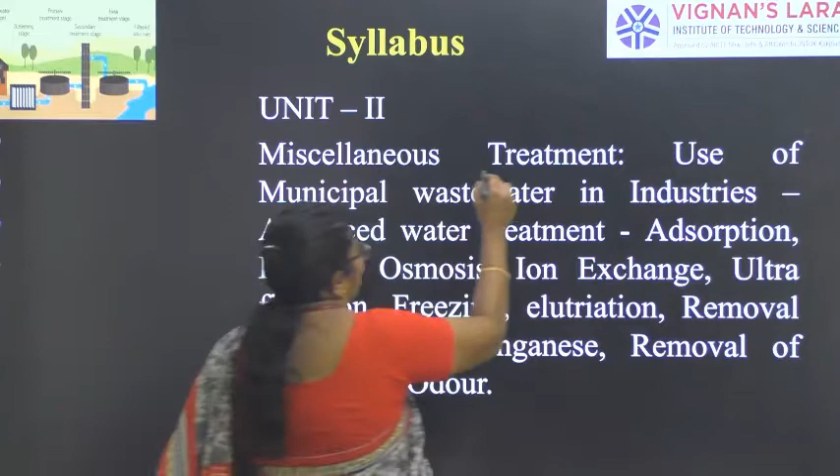Welcome students. In wastewater management, in the first unit we saw the process water in different industries, right? Quality and quantity of water, and we saw what water is required for different industries. In this unit we will go over the different treatment methods of the water. So the treatment methods, what is the advanced treatment, and what is the use of municipal wastewater in the industries.

So the main thing is, wastewater treatment consists of applying known technology to improve or upgrade the quality of the wastewater. Even filtration, sedimentation, small things also come under this, to improve the quality, that is, upgrade the quality of the wastewater.

The main objective of wastewater treatment is to allow human and industrial effluents to be disposed of without danger to human health or unacceptable damage to the natural environment. So it should not cause any damage to the natural environment or to human health. That is why we go for treatment of the water, either municipal wastewater or industrial wastewater.

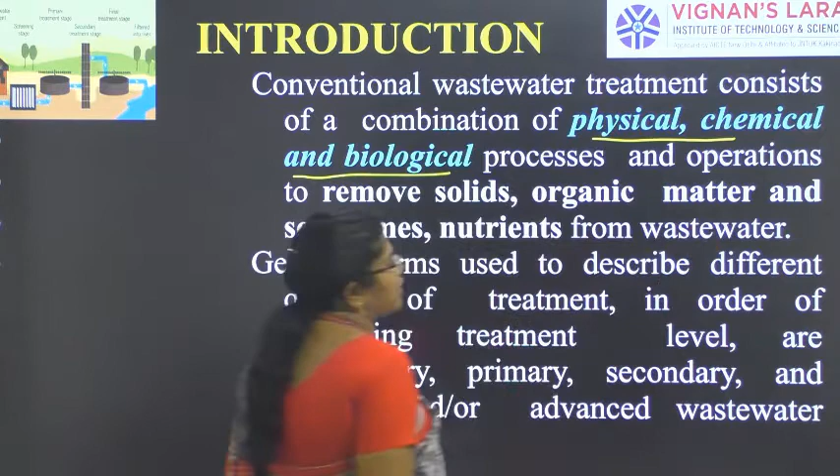Conventional wastewater treatment consists of a combination of physical, chemical and biological processes and operations to remove solids, organics and sometimes nutrients from the wastewater. So there is treatment for solids, organics or inorganic substances in the wastewater, and it is based on the physical, chemical and biological characteristics of the wastewater.

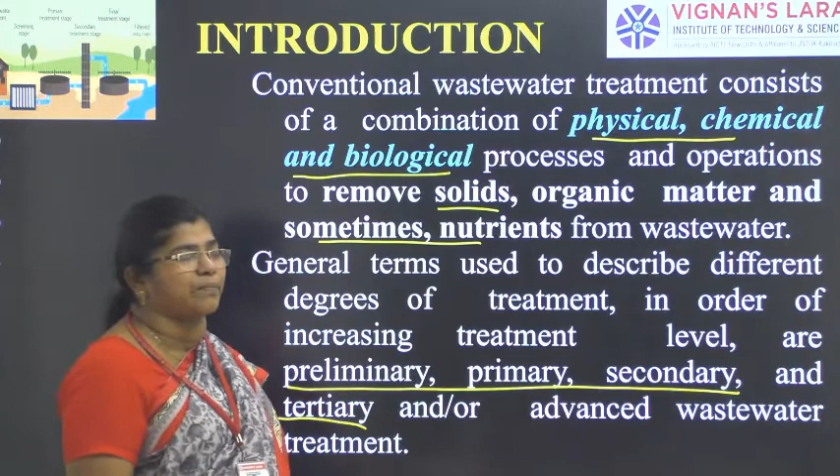Here we will see the general terms used in the treatment of wastewater, the advanced methods, and we go through preliminary treatment, primary treatment, and tertiary, or advanced, wastewater treatment.

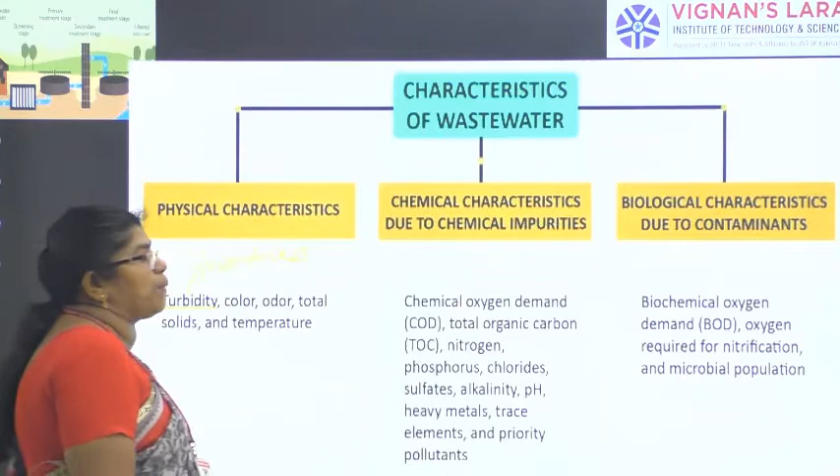Coming to the chemical characteristics: COD (BOD comes under biological), total organic carbon, nitrogen, phosphorus, chloride, sulfates, alkalinity, pH, heavy metals, trace elements and priority pollutants all come under chemical characteristics. Coming to the biological characteristics: biochemical oxygen demand, that is BOD, oxygen required for nitrification and microbial populations. These are the characteristics of the wastewater.

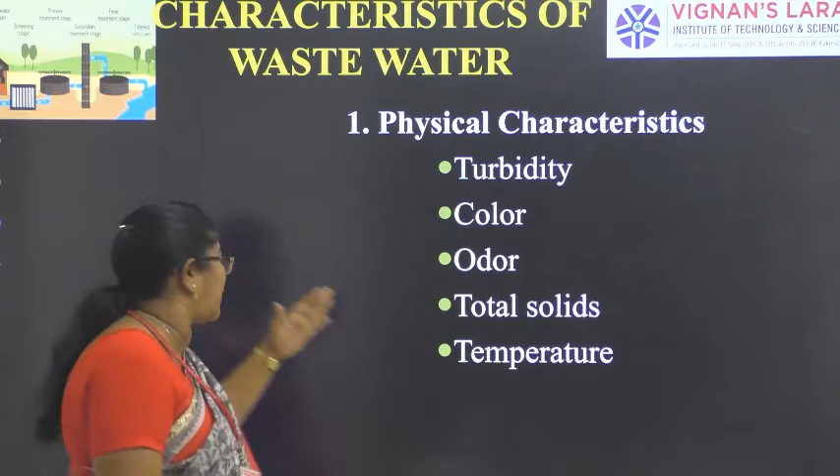So already we have seen turbidity, color, odor, total solids and temperature; biological characteristics by BOD, oxygen needed for nitrification and microbial parameters; and chemical oxygen demand, COD, total organic carbon, nitrogen, phosphorus, chloride, sulfates, alkalinity, pH, trace elements and heavy metals. To treat for the various characteristics we have treatment methods: preliminary, secondary and advanced treatment.

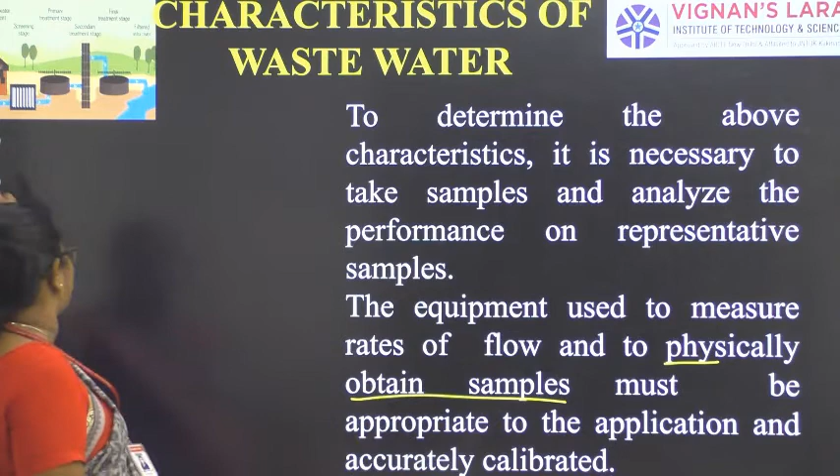But before taking the wastewater for treatment, we have to obtain samples physically and they must undergo characterization studies to know what is there. That process we call the sampling process. Sampling is the process used to select a small portion of water or wastewater for the purpose of determining the characteristics of the entire batch of the wastewater.

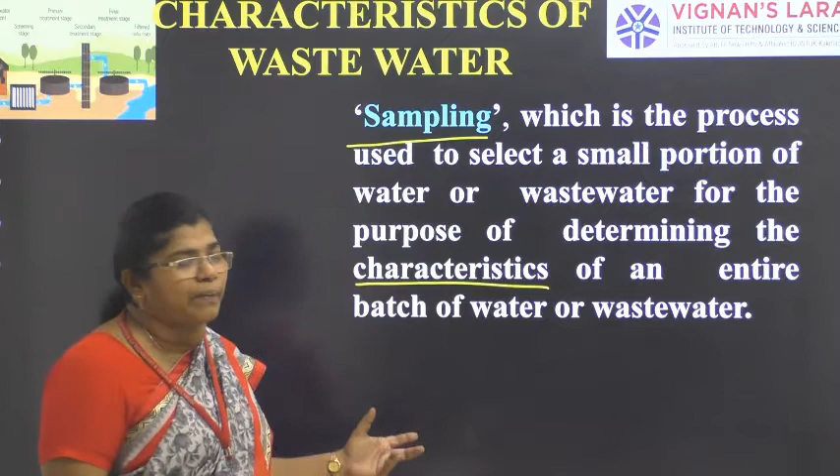So in sampling we take a small portion of the wastewater and do different tests, laboratory tests, field tests, to determine the characteristics of the entire batch of water or wastewater. So what is the water treatment? It is preliminary, primary, secondary, tertiary or advanced treatment. First we will go for the preliminary treatment.

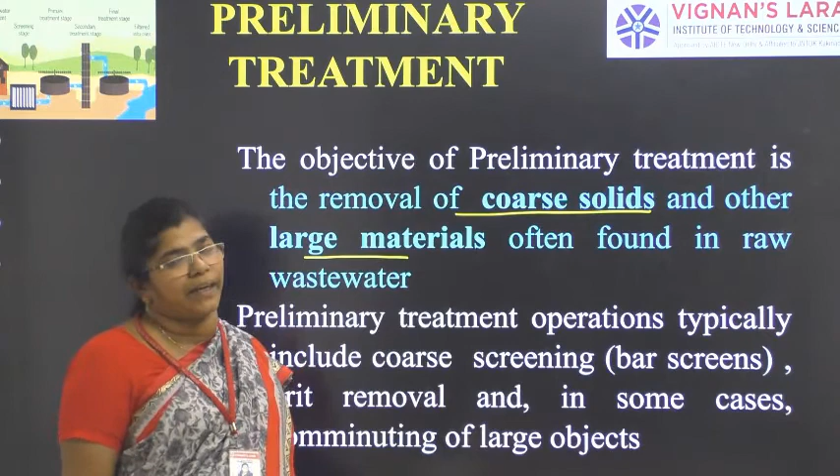Coarse solids like paper, wood parts, glass, big stones, everything will be there. That we call coarse solids. These coarse solids and other large materials found in the water have to be removed before going to the next treatment, right? This we call preliminary treatment.

Preliminary treatment mostly includes coarse screening or bar screens, grit removal, and in some cases comminutors to remove this. We will see one by one what a bar screen, a comminutor and a grit chamber are. A bar screen is a mechanical filter used to remove large objects such as rags and plastics.

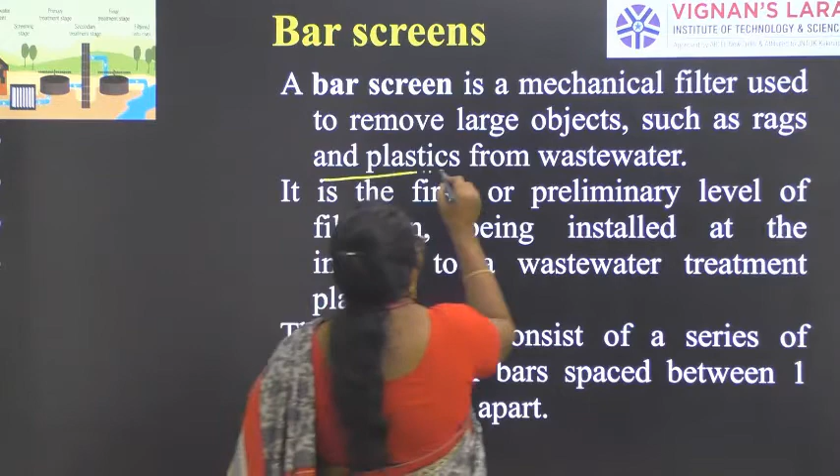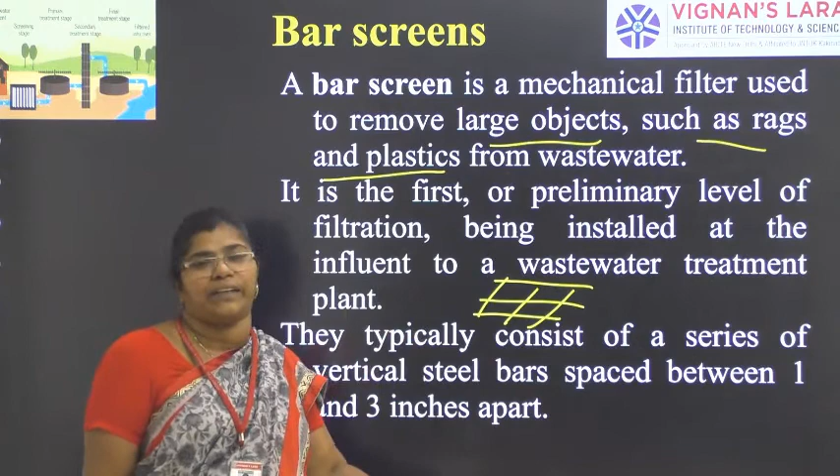Okay, it is used to remove large objects. It will be like having bar screens like this of larger depth, which will not allow them to go through. As you have in the kitchen, you have a filter in order not to allow the bigger particles, like the curry leaves and others, to go into it and block the pipes. That is one example of bar screens.

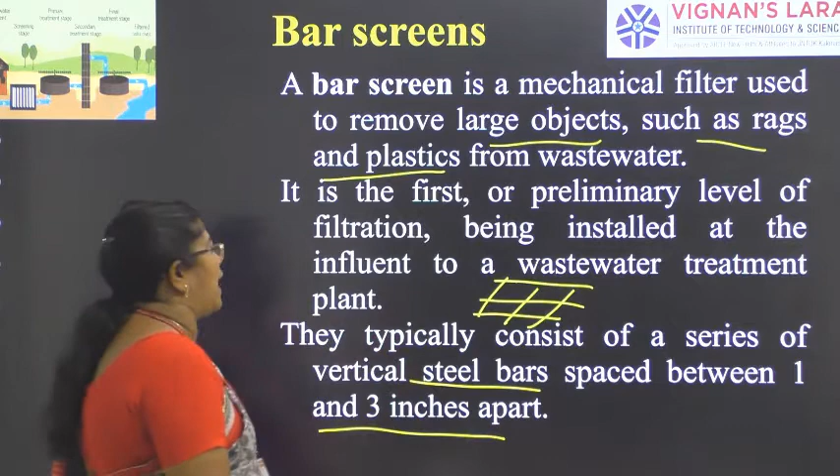So the next one is, bar screens come in many designs. Some have automatic cleaning mechanisms. Nowadays we are going in for automatic cleaning mechanisms, so it will automatically clean and remove it. Okay, some must be cleaned manually by means of a heavy rake. So you can see here, this is a rake. We call this a rake.

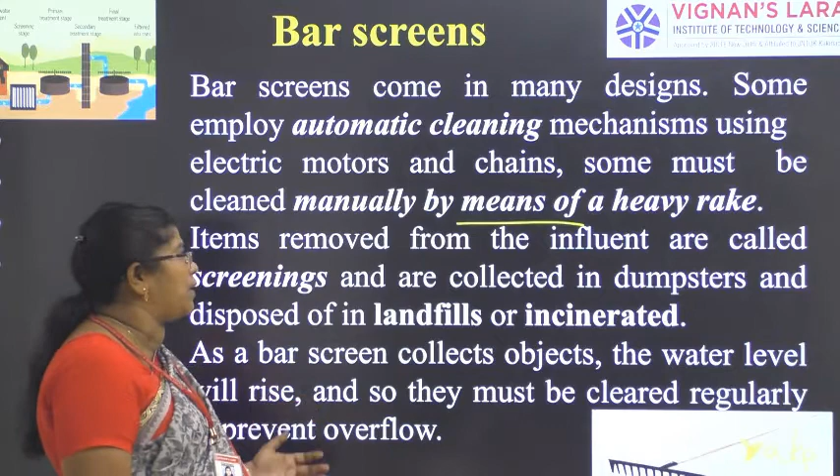Okay. So either it comes with a heavy rake, or it comes with some motors or chains by which it can automatically be cleaned, or it has to be cleaned manually like this. Items removed from the influent are called screenings and are collected in dumpsters and disposed of in landfills or incinerated. These waste materials, we call them the screenings, and they will be either dumped on land or in waste places, or incinerated. Incinerated means it will be put on fire, demolished by fire, made into ash.

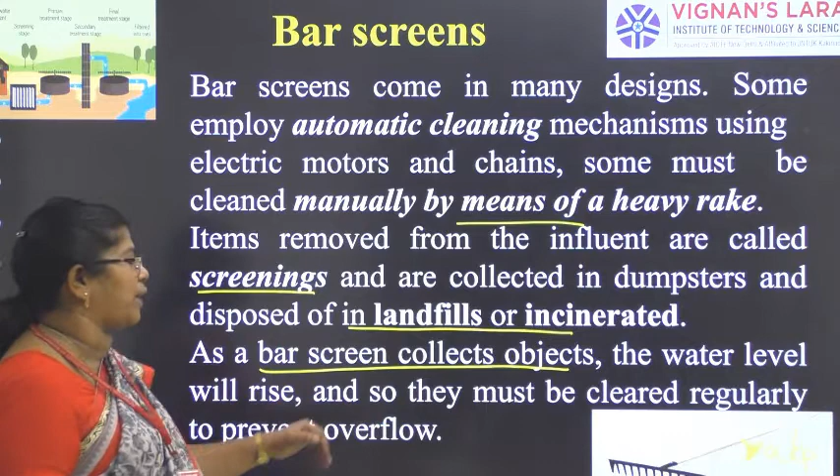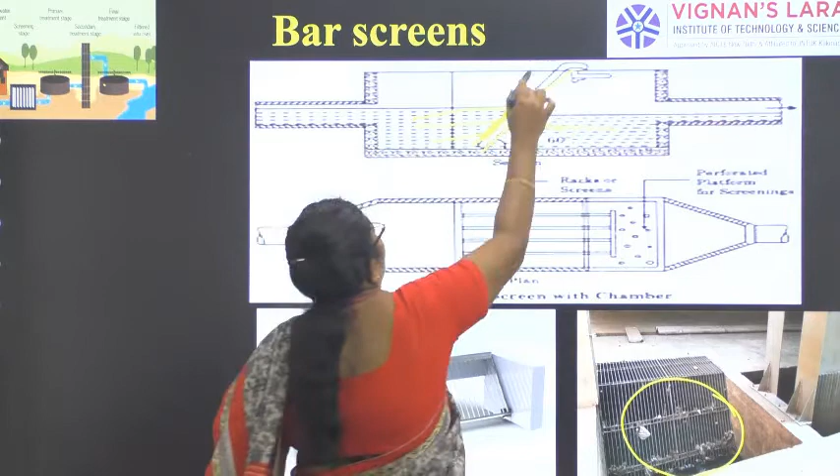As a bar screen collects objects, the water level will rise, so they must be cleared regularly to prevent overflow. Because if particles are held, the water level will rise. So here, in order to avoid the overflow of water, we have to design it accordingly.

Next one, it is the comminutors. Comminutors are shredding or screening devices widely used in wastewater treatment plants and pumping stations. Comminutors break down wastewater solids in plants, networks and pump stations. The equipment gets heavy use and it is a critical part of a wastewater treatment plant.

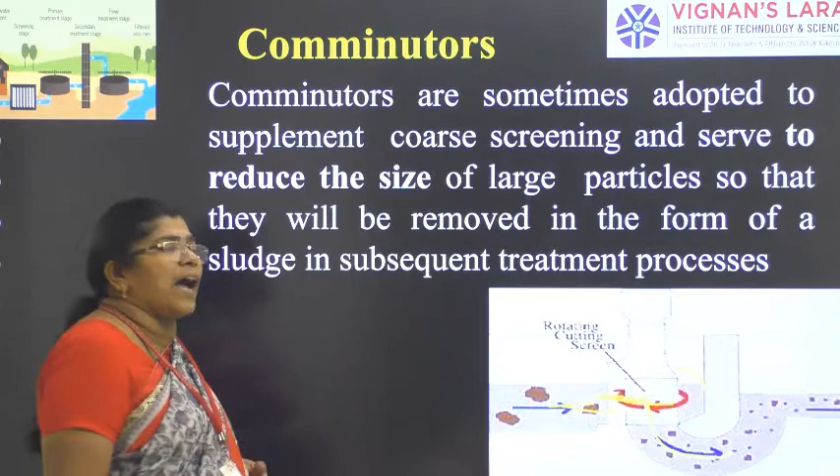So it is a rotating screen. It will be rotating like this. The particles that are coming will not be allowed in, and they will be stuck outside. So the water that is moving will go like this, carrying the smaller particles. The larger particles will be stuck outside the drum. This is called a comminutor. It reduces the size of the larger particles, so that they will be crushed into smaller particles and allowed through due to the rotating movement, or we call it a whirlpooling movement.

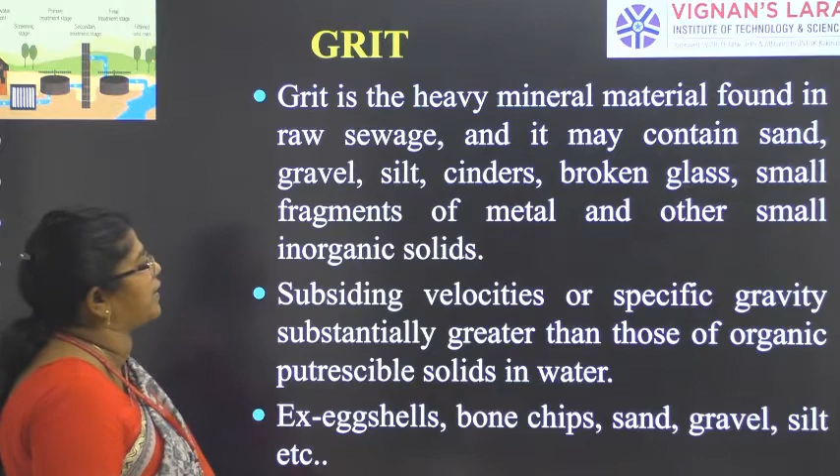The third one is the grit. Grit is a heavy mineral material found in raw sewage, and it consists of sand, gravel, silt, broken glass, small fragments of metals and other inorganic solids. To remove all these things, we will have a grit chamber. We reduce the velocities and allow the water to flow. Due to the specific gravity variations, it will block the movement of these materials. For example, eggshells, chips of bones, sand, gravel, silt, everything will be removed.

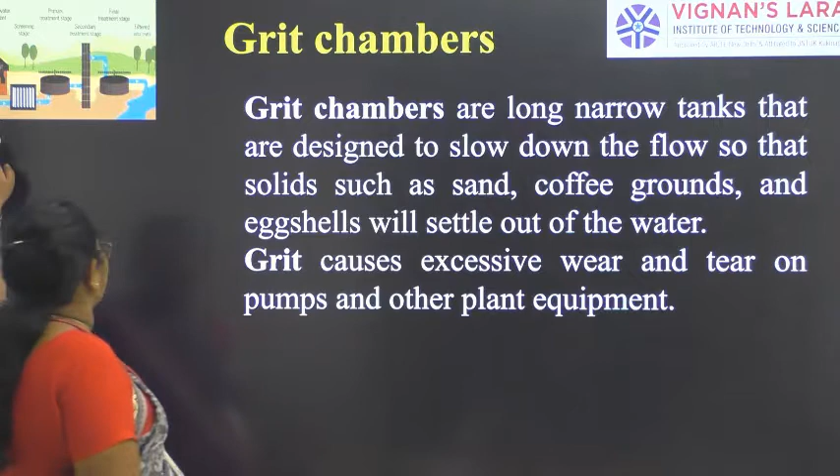Grit chambers are long narrow tanks that are designed to slow down the flow so that solids such as sand, coffee grounds and eggshells will settle out of the water. Grit causes excessive wear and tear on pumps and other plant equipment. So this is the second unit operation in the preliminary, or even called primary, treatment. It is used to remove suspended inorganic particles such as sandy and gritty material. To avoid deposition in the pipelines, channels and conduits, and reduce the frequency of digester cleaning, we go in for these grit chambers.

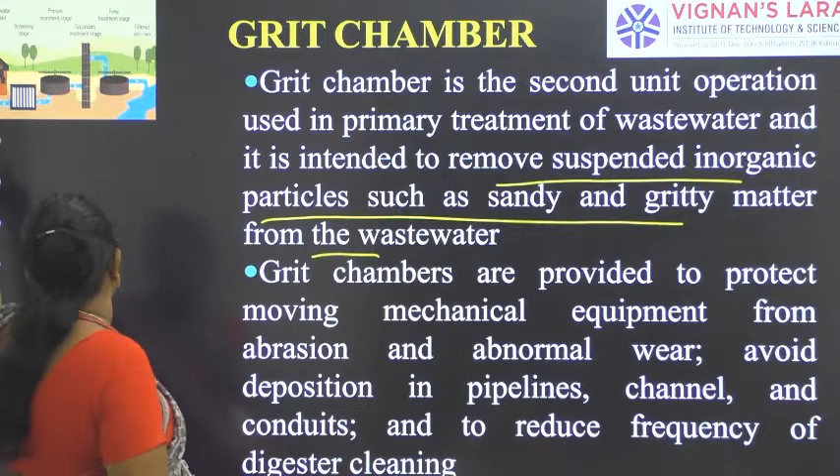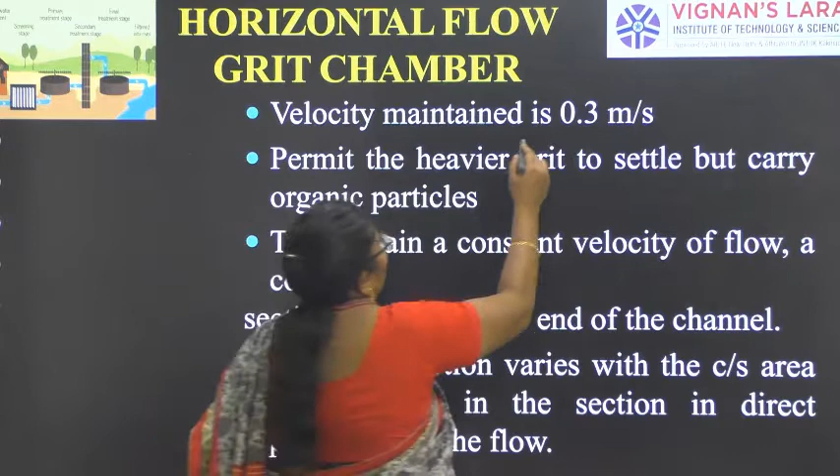There are two types of grit chamber. One is horizontal, one is the aerated grit chamber. In the horizontal grit chamber, the velocity maintained is 0.3 meter per second, which permits the heavier grit to settle but carries the organic particles through.

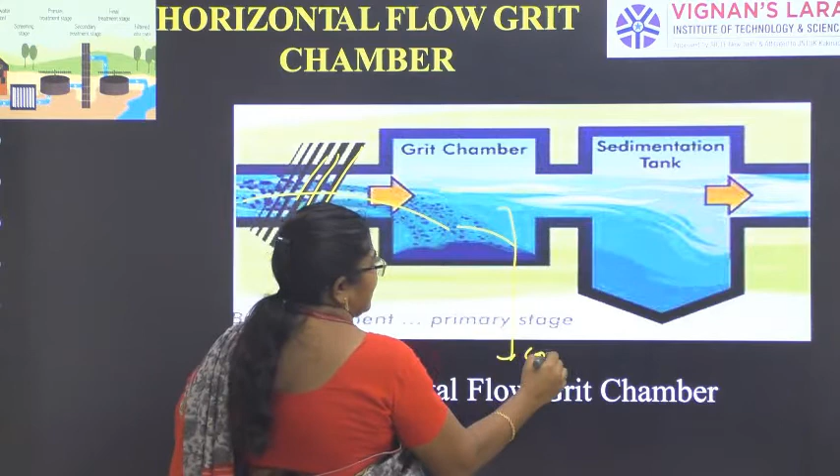It will maintain a constant velocity of flow, so it will reduce the settlement of the particles, and a control section varies with the cross-sectional area of the flow in direct proportion to it. You can see here this is a grit chamber. The particles move slowly and settle here, while the remaining particles move on at constant velocity, then the water goes next to the sedimentation tank, where it gets sedimented for some time.

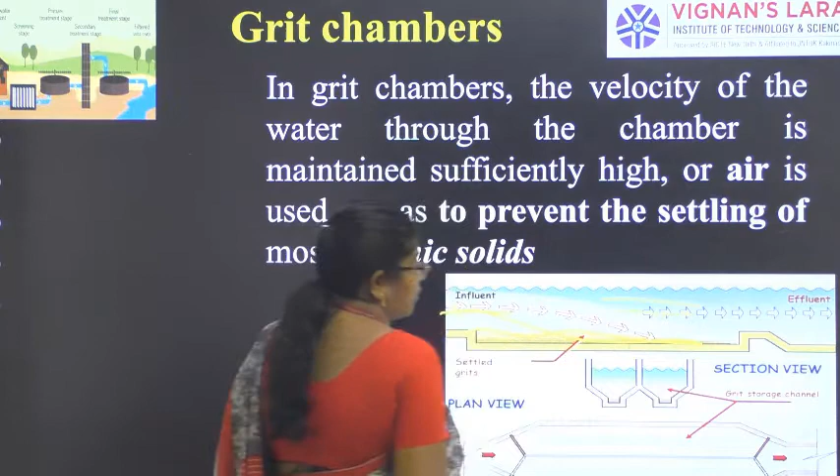Next one, aerated grit chamber. It will have the flow of aerated particles. A standard spiral flow aeration tank provided with air diffusion cylinders is one of the effective types, because instead of removing particles by slow flow, it removes them with the help of aerated, circular spiral movement. The particles tend to settle down to the bottom of the tank at rates depending upon particle size and the velocity of the spiral flow roll, which itself depends upon the rate of air diffusion coming from the diffusion tubes.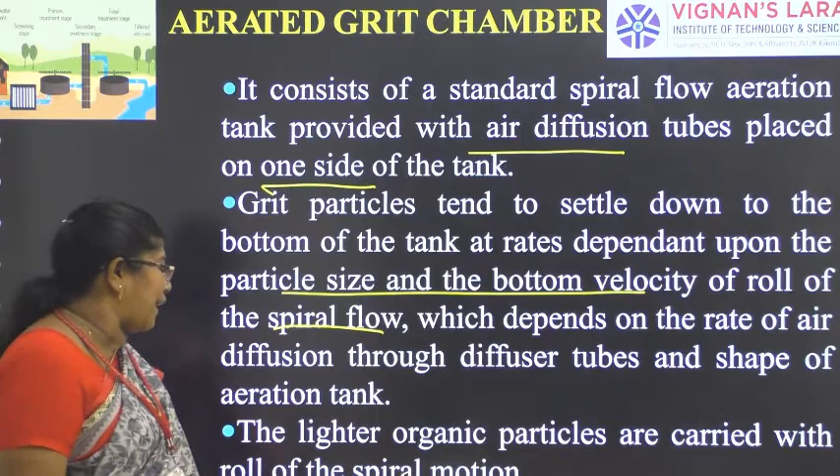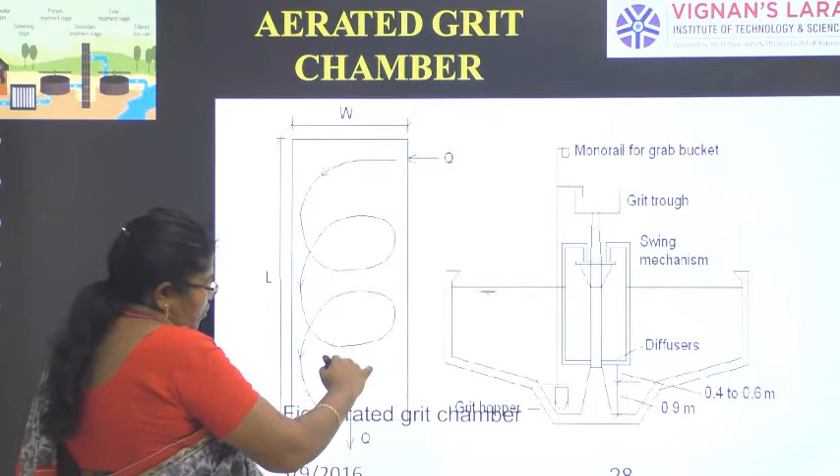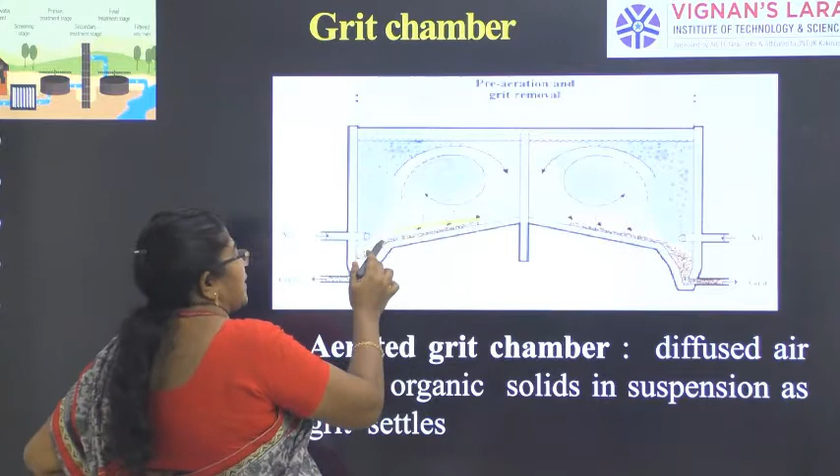The lighter organic particles are carried and rolled with the spiral motion. You can see here it comes in a spiral motion and slows down, so the particles settle here. You can see the grit through the diffusers of this size is allowed to pass. This diagram clearly shows the air diffuser, and due to the spiral movement the grit and everything settles here, which is removed through another output, while the water is taken to the next stage.

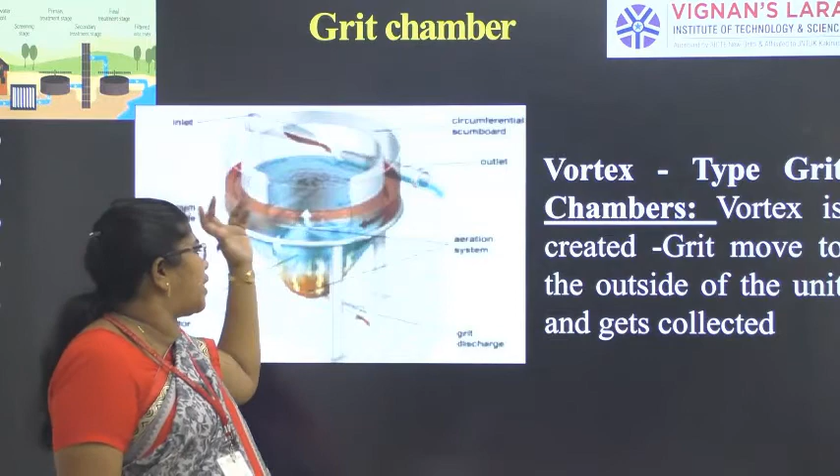So the aerated grit chamber is mostly of two types. One is this diffused air type, the next is the vortex type. The vortex type has a whirling movement, like a washing machine's whirlpool movement, by which waste materials come and settle at the bottom. After settling, we either need an outflow pipe or sludge pipe for cleaning, or we allow a detention time so everything settles at the bottom and we remove it manually. Those are the two types we can go for.

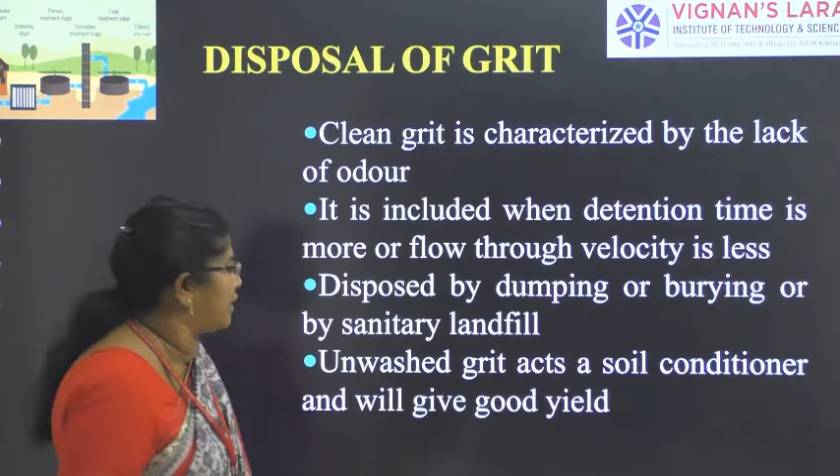So in the preliminary treatment plant, we had bar screens, comminutors, and the third one, grit chambers including aerated grit chambers.

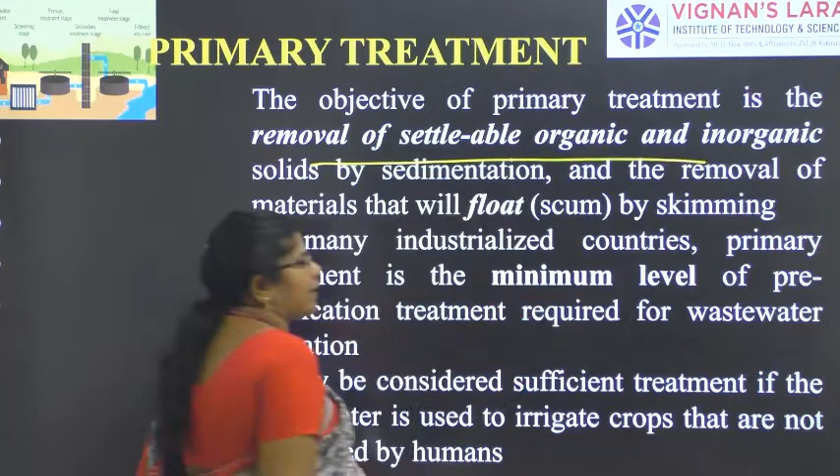Next we will go for the primary treatment. The objective of the primary treatment process is the removal of settleable organic and inorganic solids by sedimentation, and the removal of materials that float. Either we remove settleable organic and inorganic solids, or we remove oil and other greasy materials. Sedimentation handles the solids, while removal of grease and other floating particles is done with the help of the skimming process. So these are the two processes that go with the primary treatment plant.

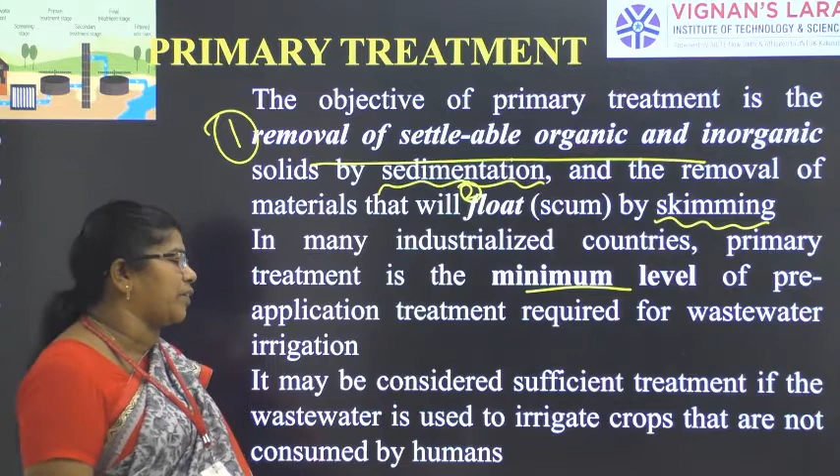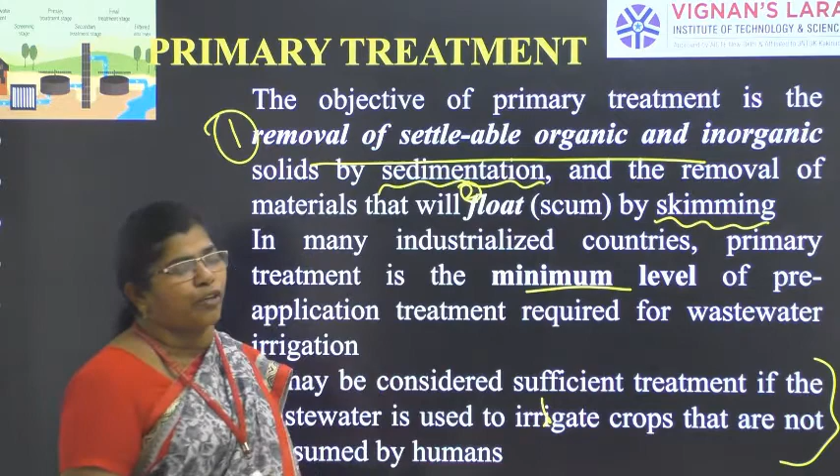In many industrialized countries, primary treatment is the minimum level of pre-application treatment required for wastewater, and it may be considered sufficient if the wastewater is used to irrigate crops not consumed by humans. Once we remove all the inorganic and organic solids by sedimentation, along with floating materials, many places use the water directly for irrigating crops, and further treatment is not necessary.

By this method, 25 to 50% of BOD, 50 to 70% of the total suspended solids, and 65% of the grease and oils will be removed. Some organic nitrogen, organic phosphorus, heavy metals, everything can be removed efficiently by this method.

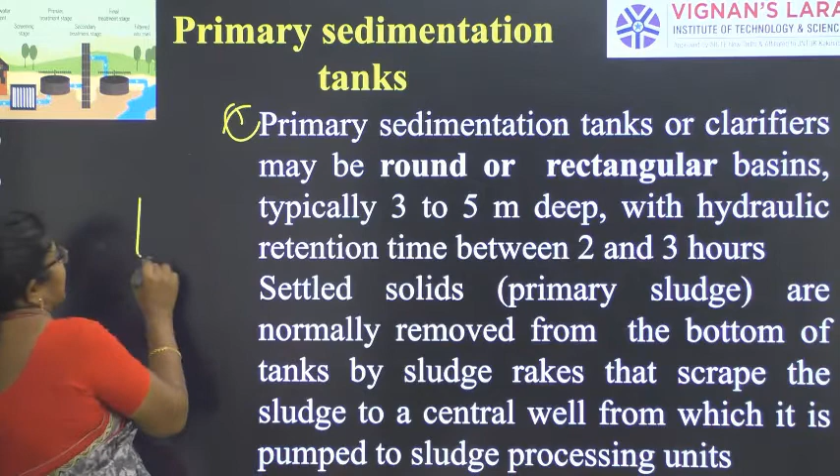What is primary sedimentation? The primary sedimentation tank is either round or rectangular, and will be 3 to 5 meters deep, with a hydraulic retention time of 2 to 3 hours. The water will be allowed to stay there for a minimum of 2 to 3 hours in order to have the settlement of the particles.

The settled waste particles, we call sludge. The settled solids are removed from the bottom to the sludge removal tanks, either by rakes, by scraping, or taken by separate means.

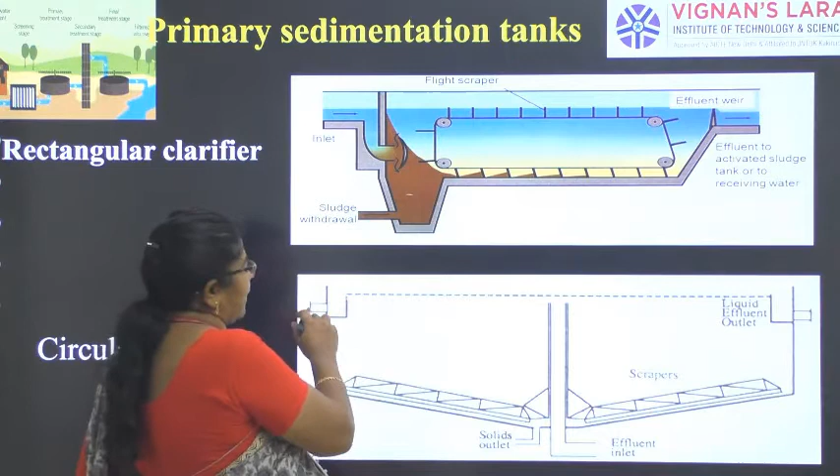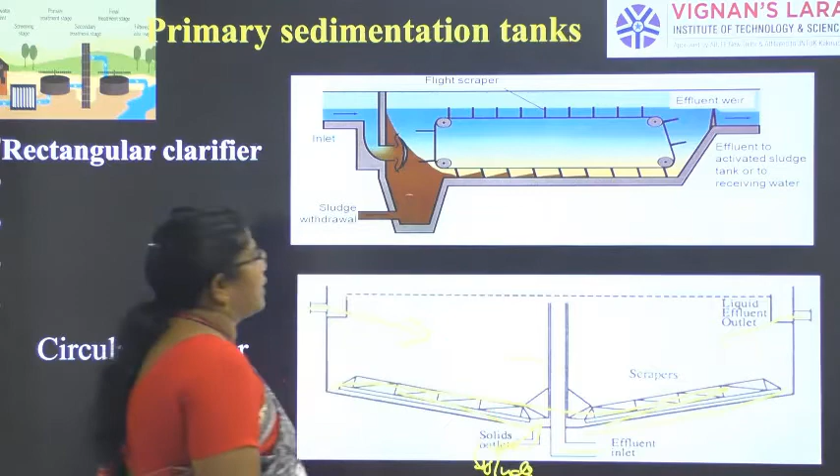So you can see here, this is what we call the settlement tank. Here the water is clarified and settled, so it will be allowed to flow. Due to this slope, the solid particles come and settle here, which will be removed by the solid outlets or sludge. This will be removed as sludge, and the remaining water will be taken for the next process. This is a rectangular type, this is a circular type.

The next one is a skimming tank. The skimming tank is used to remove the oil, grease, and the scums. So the oil, fat, grease, etc. will be removed by this.

Here we will be allowing the water to flow. There will be one chamber which will not allow the water to pass through. So this water will go here, and the remaining part, air is allowed to flow, so the oil and skim will be floating here. These floating particles will be removed here, and from the bottom, the remaining water will be taken to the next stage. So this is the inlet, the water comes in, and this is the outlet.

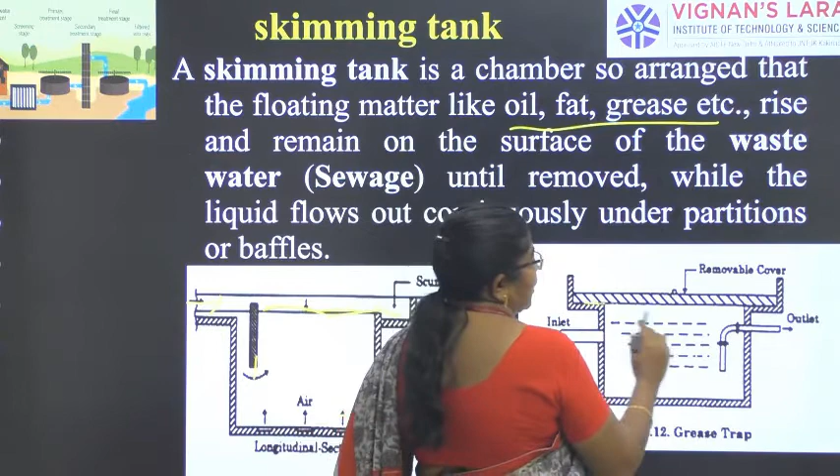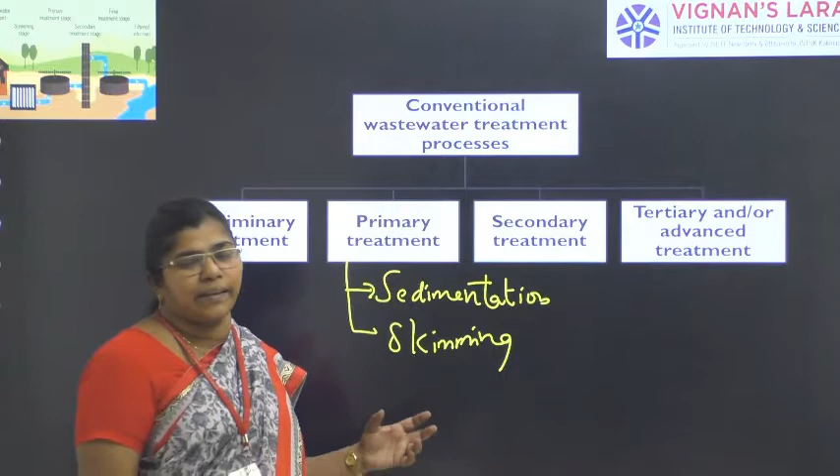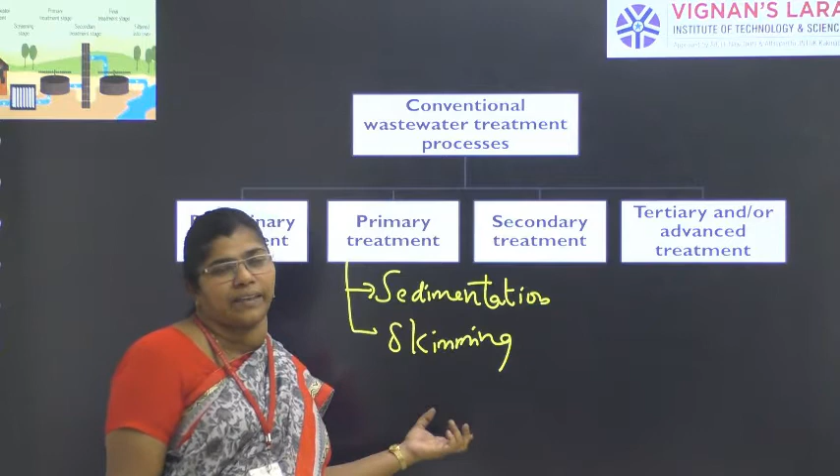So in primary treatment we saw two methods. One is the sedimentation tank, used in the sedimentation process to remove sedimented settleable solids like coarse material, eggshells, bone scraps, grits, and sand - particles able to settle down by reducing velocity, with a retention time of minimum 2 to 3 hours. The other is the skimming process, used to remove grease, fats, and oils, in the primary treatment plant.

Now we will go for the secondary treatment. The objective of secondary treatment is to remove the residual organics and suspended solids. Whatever is dissolved in it, we will be able to remove with the help of the tertiary treatment plant. Here, aerobic biological treatment is performed in the presence of oxygen by aerobic microorganisms.

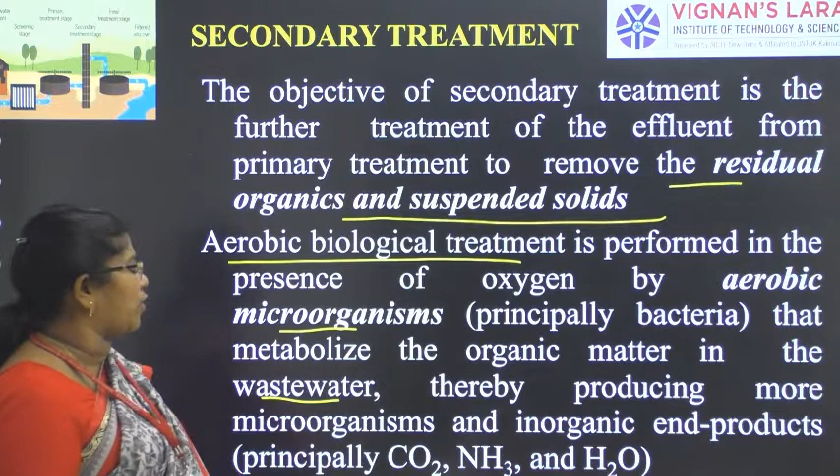Principally aerobic microorganisms, bacteria, are used, and they metabolize the organic matter in the wastewater, thereby producing more microorganisms and inorganic end products, principally CO2, NH3, and H2O. Common high rate processes include the activated sludge process, trickling filters, and rotating biological contactors.

So first we have the activated sludge process, second we have trickling filters, which are also called biofilters by many names, and third we have RBC, or rotating biological contactors. Mostly they will have a biofilter followed by the activated sludge process, which will give a more efficient result.

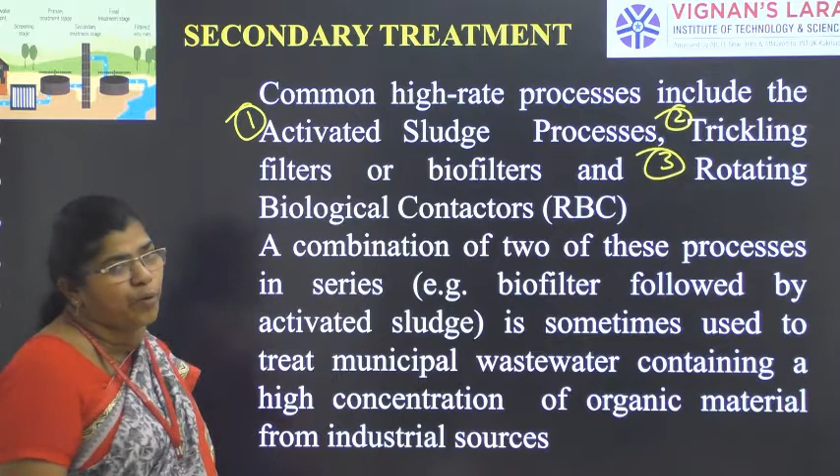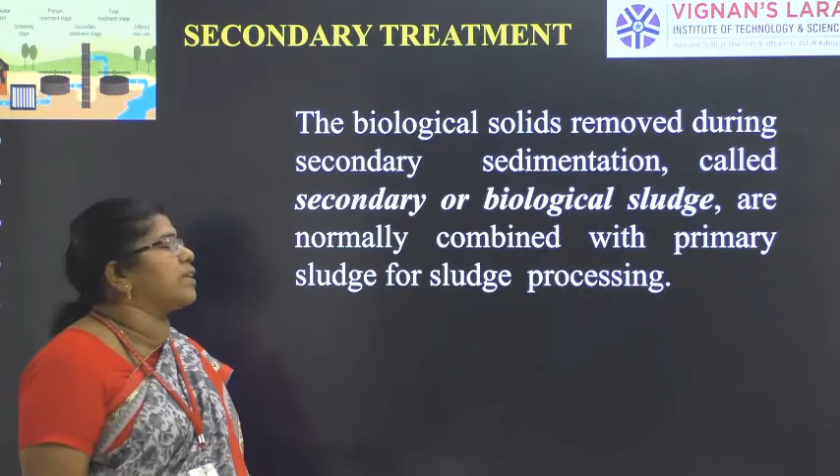Actually the secondary treatment can also be given as a secondary sedimentation process. After the primary sedimentation, the waste material is taken to the secondary settling tank, where it will again be allowed to settle down. This is one of the other processes that comes under the secondary treatment.

The next one is the activated sludge process, where sludge is activated with the help of aerobic bacteria. It is an aerobic process, and the dispersed growth reactor is an aeration tank or basin containing a suspension of wastewater and microorganisms called mixed liquor. So aerobic bacteria are added, which keep the microorganism mixed liquor, in an aeration tank or basin containing a suspension of wastewater.

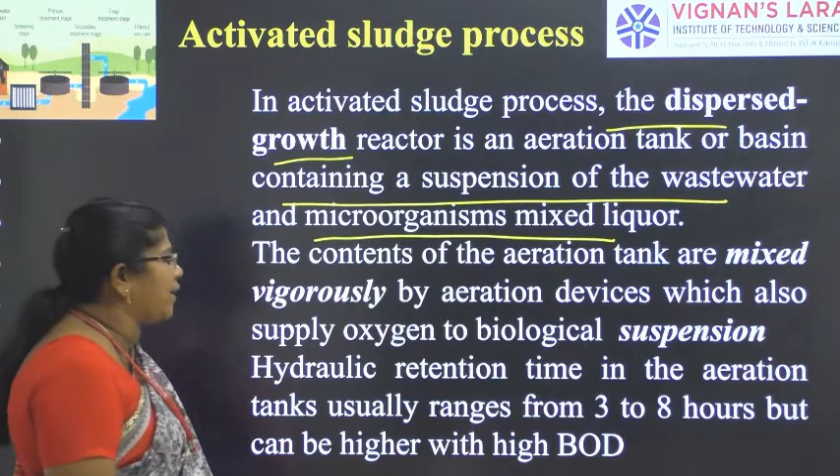The contents of the aeration tanks are mixed vigorously with the help of clarifiers and aeration devices, which also supply oxygen to the biological suspension. Hydraulic retention time in the aeration tanks usually ranges from 3 to 8 hours, but can be higher when the BOD is higher. This is a schematic diagram of the activated sludge process.

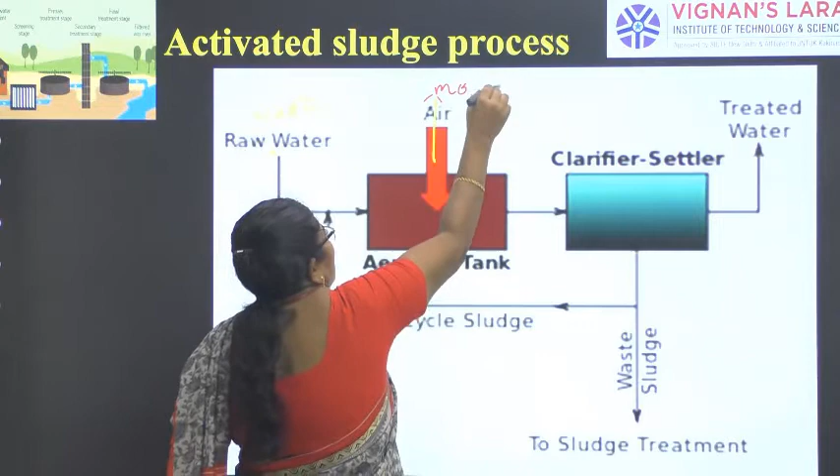So here we go for the raw wastewater. We are taking the wastewater from the primary treatment plant to the aeration tank. Here air is given, and it will be attached with some motors, so that the particles, with the help of vigorous mixing, will be mixed well.

Then it will be taken to the clarifier and settlers, where it will be there for 6 to 8 hours, which allows the particles to settle down. After mixing, the sludge will be in a dispersed position, which will be taken next and allowed to settle down. The sludge will be removed here, and the remaining water will be taken again and added back.

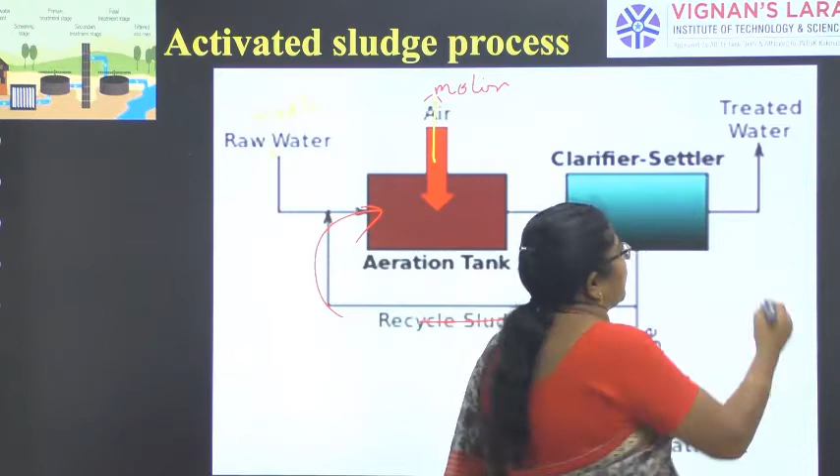Like this, the process will be treated again and again, and the treated wastewater will be taken for the next treatment process. So the general arrangement of an activated sludge process for removing carbonaceous pollution includes the following terms.

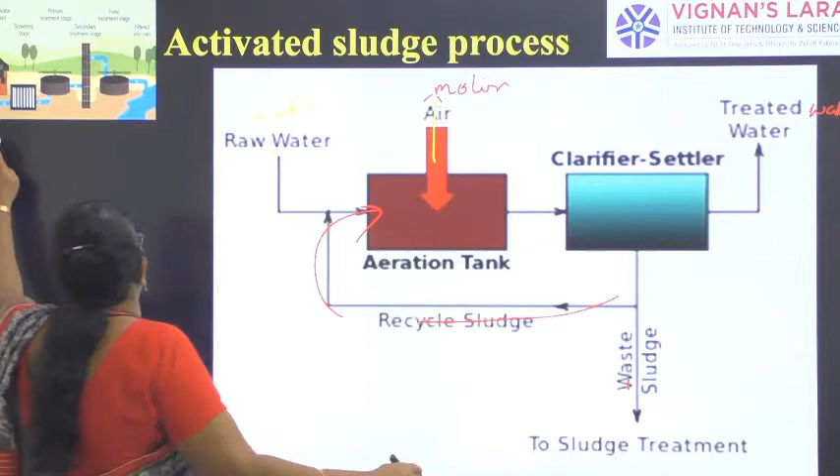An aeration tank where air is injected into the mixed liquor, followed by a settling tank. Usually we call it a secondary settling tank, where we have a clarifier and settler, where the biological flocs will form. What is flocs?

It is when small particles combine together to form bigger particles. We call it flocs, right? And thus it is separated, the biological sludge from the clear treated water.

So this is after the preliminary treatment, we go for the primary clarifier, primary settling tank. From the primary settling tank, it is taken to the aeration tank. So the air is allowed to move through, which vigorously rotates and allows the sludge to move. So what will happen is every particle, that is the biological particles, will be in an active stage or in the suspension stage in the aeration tank.

So from this aeration tank, it is taken to the secondary clarifier. The secondary clarifier is a clarifier with a sedimentation tank.

So here what will happen, the clarifier and the sedimentation tank, after agitation it will be allowed here and settled for 6 to 8 hours. So all the solid particles will settle down, and since it has a sloped bottom, the sludge particles will be collected at the bottom, which will be taken down as waste activated sludge.

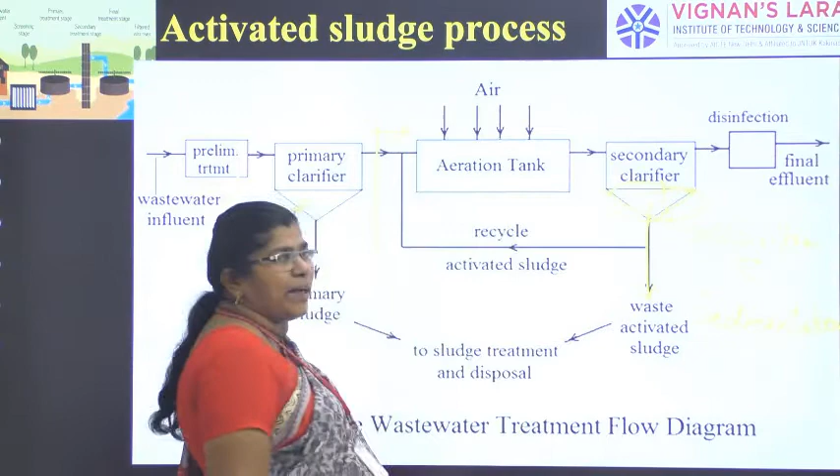The remaining water will be taken and used again for the aeration tank for recycling purposes. So after this secondary clarifier, the treated wastewater will be taken for the next process, disinfection, and it will be taken for the final effluent. This is the activated sludge process.

The second one is the trickling filter, right? We have several names for this: trickling filter, biofilter, biological trickling filter are often used to refer to a trickling filter.

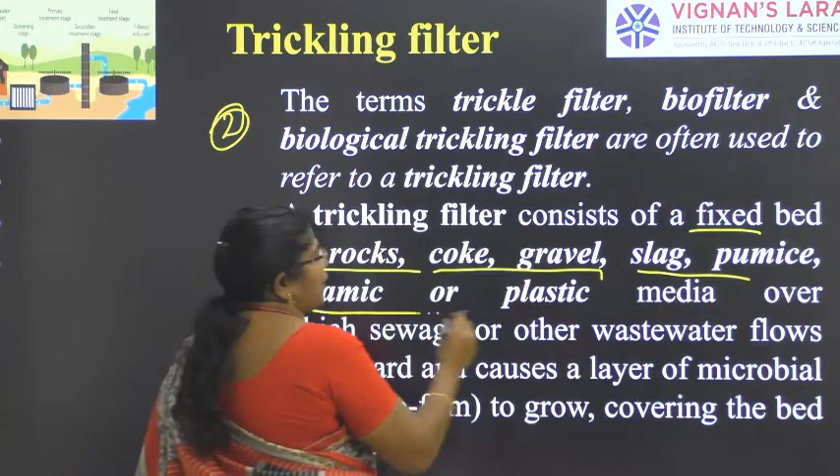It consists of a fixed bed of rocks, coke, gravel, slag, pumice, ceramic or plastic media. Any one type of media will be there: coarse particles, coke particles, carbon or slag or pumice stones, or plastic or ceramics, over which the wastewater will be allowed to flow in a very slow manner.

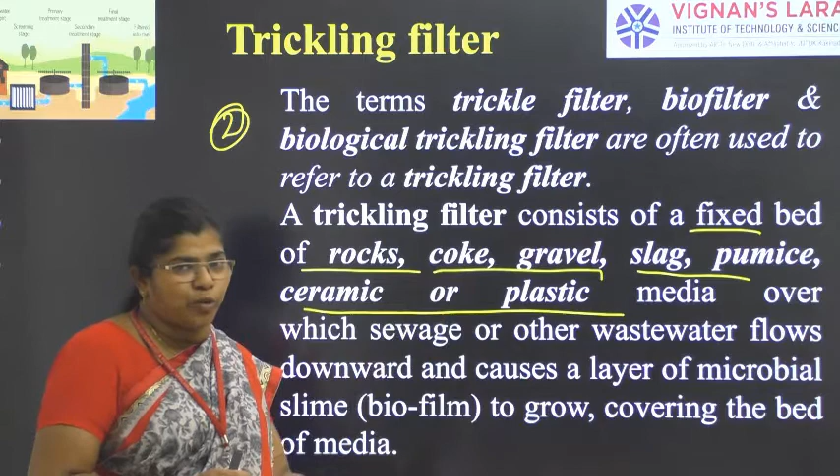So what will happen is these particles will develop a microbial slime or microbial film, which will not allow the microbiological bacteria in the wastewater to move down. So when the water moves from one layer to another layer, at the last it will come out as a pure layer. Mostly you can easily see this process in the water treatment plant also.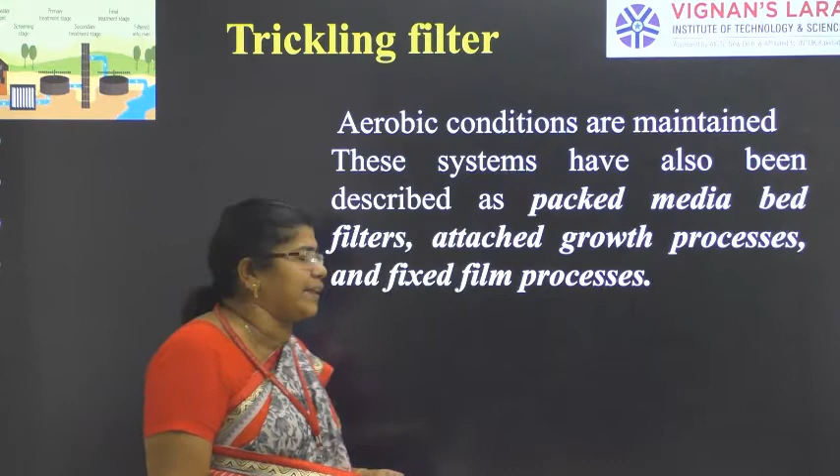This process maintains aerobic conditions, and it is having a packed media bed filter, and it is also attached with an attached growth process and fixed film process.

So you can see here, this is one of the trickling filters. It is a very large one, having around 20 meters in diameter. Here you can see so many pipes, through which the wastewater will be sprinkled, and it is filled with carbon, coke here.

So when the water is moving down, all the particles, microbiological particles, will form a film, and it will be packed in the media and it will not be allowed to move down. So what moves down will be the treated water. Mostly the circular wall is made up of bricks and consists of filter media, which in turn rests on the base and the drains.

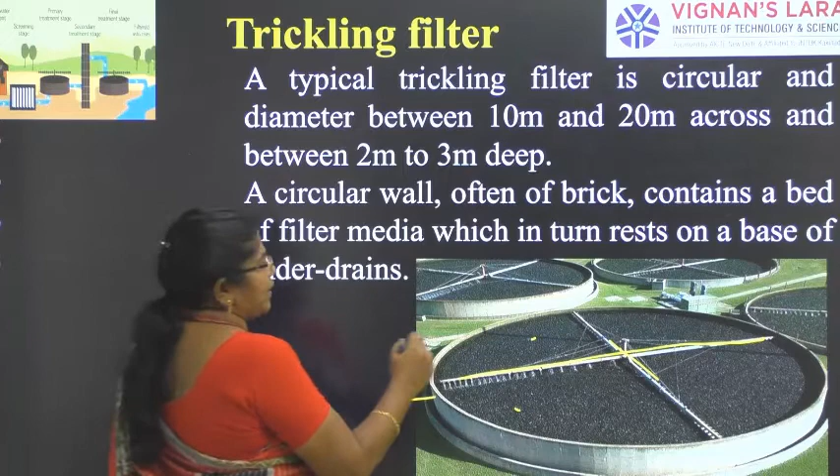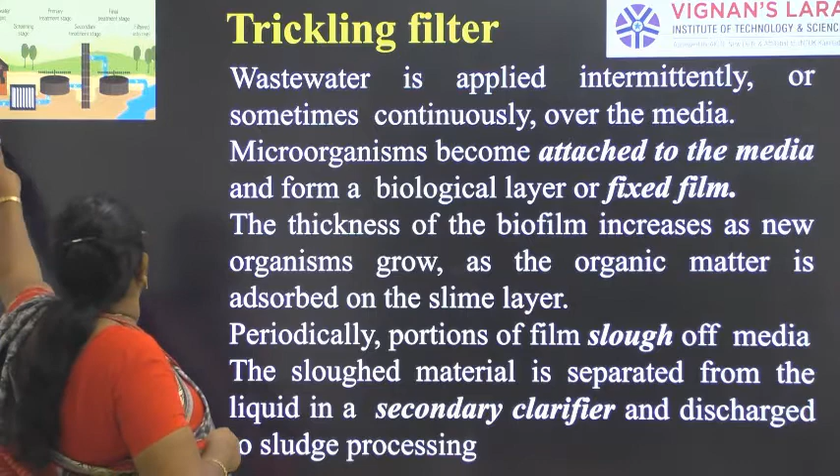So as I told you, the diameter of the filter will be around 20 meters and it will be 2 to 3 meters deep. Next we'll see one more diagram. Here this is the schematic diagram for the trickling filter. You can see the water that is there will be sprinkled. This will be the media. The media may be coke, mostly carbon, or stones, or it can be plastics or ceramics.

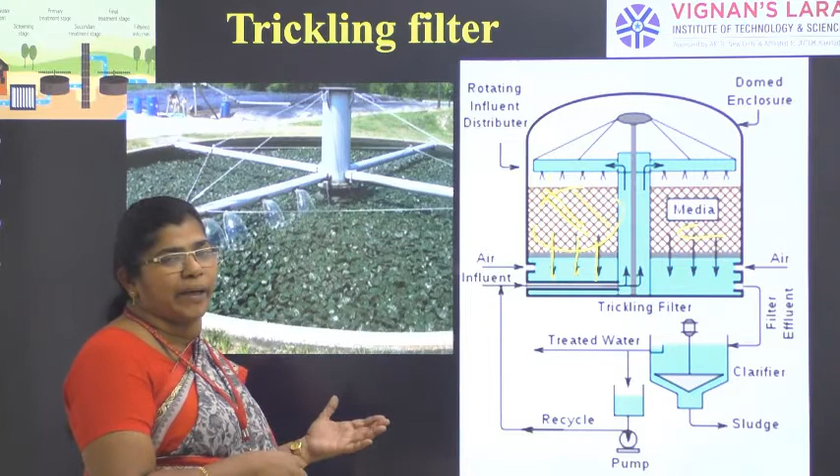After moving here, the microbiological particles will form a film and be blocked by the media, and the clean water will come here and be taken. If you want to go for sedimentation and clarifiers, it will be taken, the sludge will be removed, and it will be taken for the next process. This packed media will be cleaned periodically by the backwashing method. You can see here the water coming from the porous pipes.

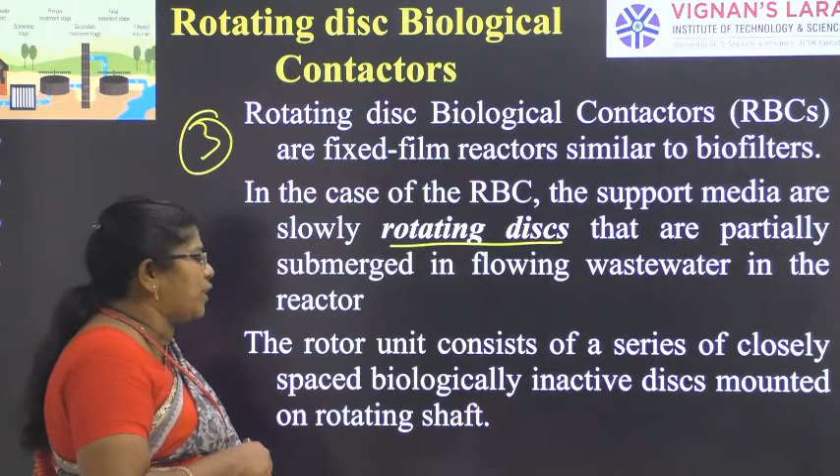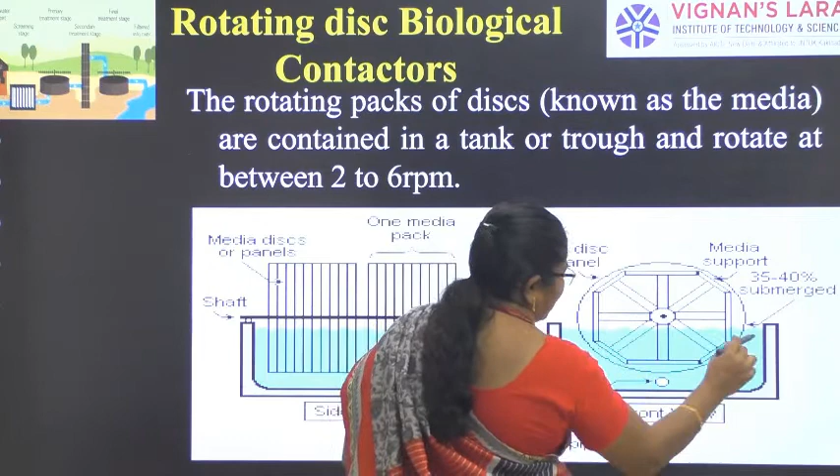The third one is the RBC, which we call rotating disc biological contactors. It is similar to the fixed reactors. The support media are slowly rotating discs that are partially submerged in the flowing wastewater in the reactor. The rotor units consist of closely spaced biologically inactive discs mounted on the rotating shaft. We can see here, this is the rotating shaft. It will be partly submerged in the wastewater, and the rotating packs of discs, known as the media, are contained in a tank and rotate at 2 to 6 rotations per minute.

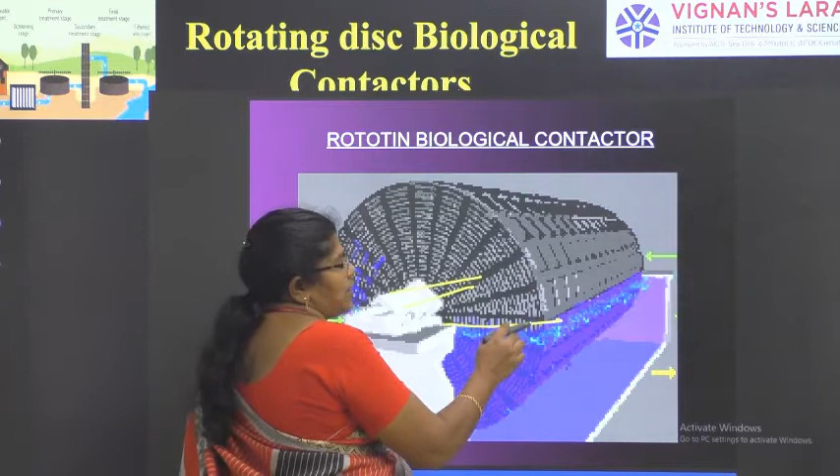So what will happen? The wastewater will be allowed to flow in the middle. All the particles will be attached to the media, and after removing the microorganisms and settleable solids, the water will come out and be stored in the tank, which can be taken for the next process. The media used in RBC is mostly polyethylene, PVC, galvanized steel, asbestos cement and expanded polystyrene.

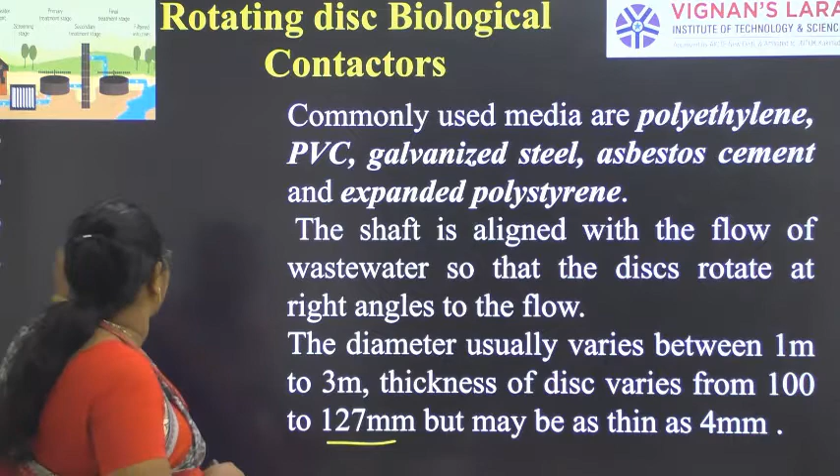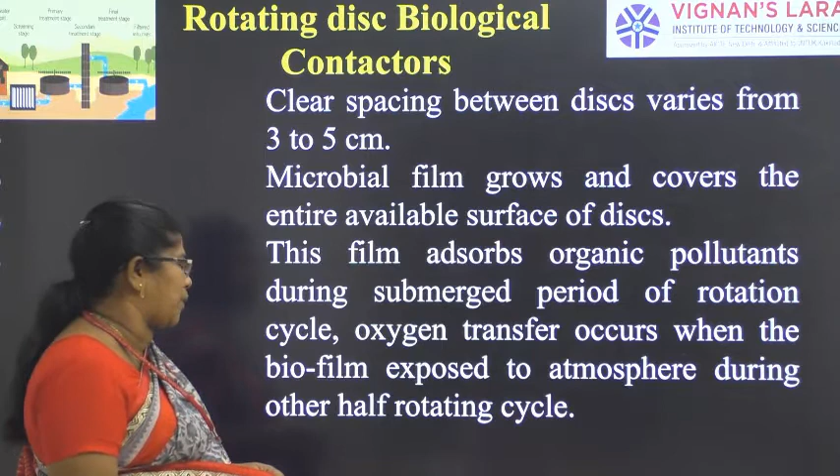The shaft is aligned with the flow of the wastewater so that the disc rotates at right angles to the flow, at a speed of 2 to 6 rpm. The diameter usually varies from 1 to 3 meters, and the thickness of the disc is very thin. The disc spacing will be 3 to 5 centimeters, and the biological film grows and covers the entire available area of the disc. This film adsorbs organic pollutants during the submerged period of the rotation cycle, and oxygen transfer occurs when the biofilm is exposed to the atmosphere during the other half of the rotating cycle.

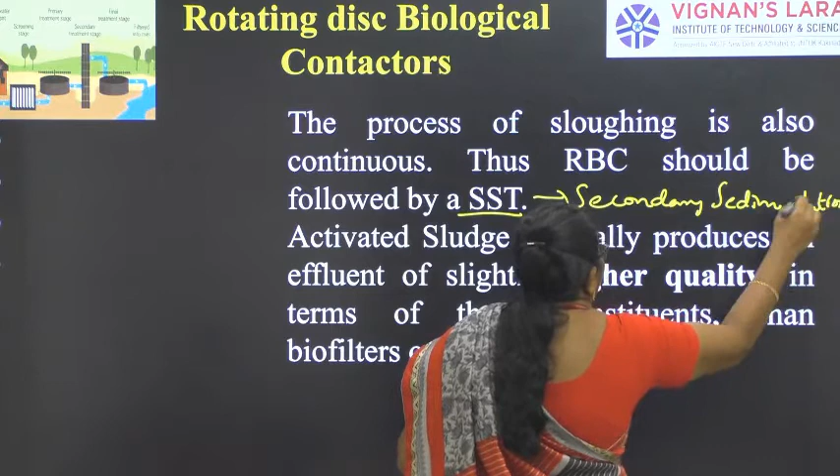This RBC will be followed by the secondary settling tank. SST means secondary settling tank or secondary sedimentation tank, where it will be retained for 6 to 8 hours before taking it for the tertiary treatment. Mostly the activated sludge process will give you more efficient treatment than the other two.

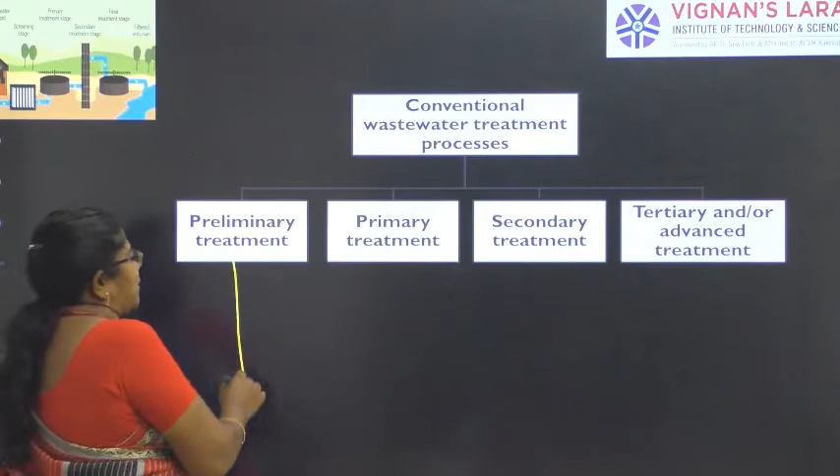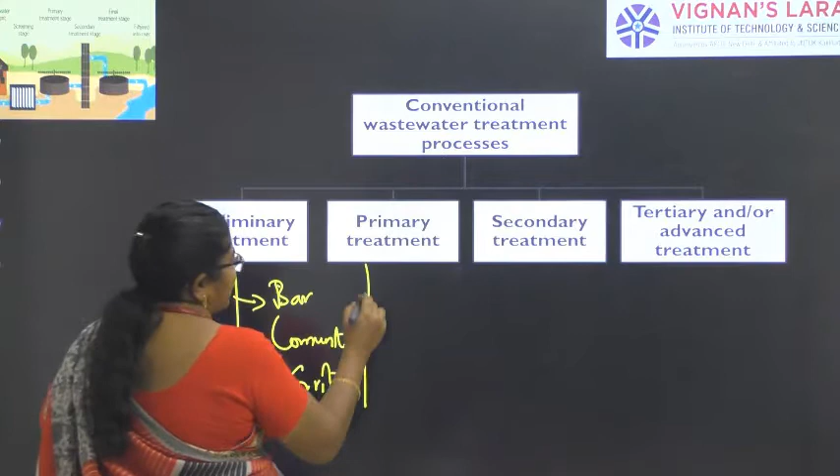So in today's class we have seen the preliminary treatment: bar screens, comminutors, and grit chambers. In the primary treatment we saw the sedimentation process and the skimming process. Skimming is used to remove fats, oils, grease and scum. In the secondary treatment we saw the activated sludge process, trickling filters, and RBC. These are the different preliminary, primary and secondary treatments.

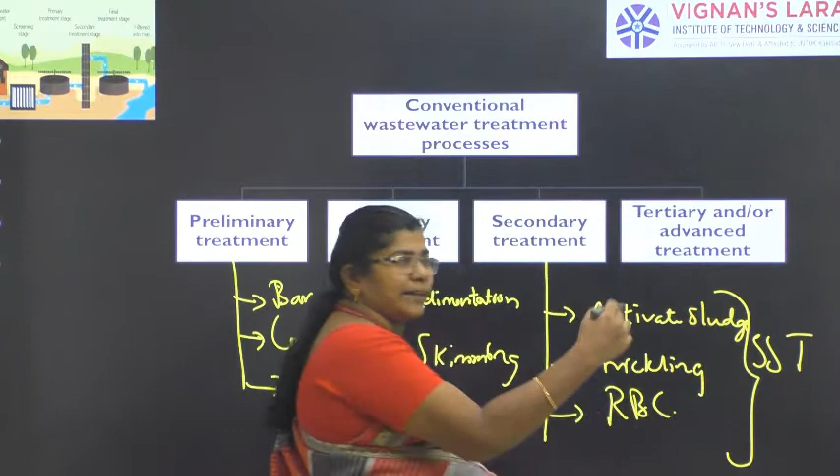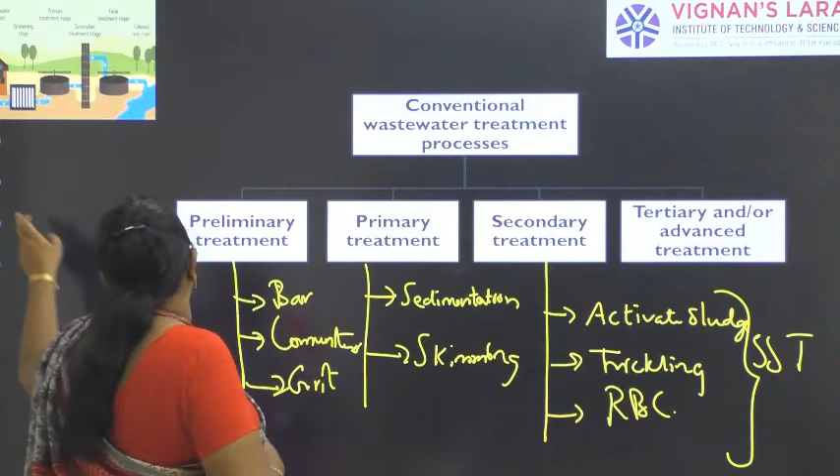All secondary treatment will be followed by the secondary settling tank, clarifier or sedimentation tank, where the wastewater will be retained for 6 to 8 hours before taking it to the next treatment, tertiary or advanced treatment methods. In the next class we will see the tertiary or advanced treatment methods. Thank you.